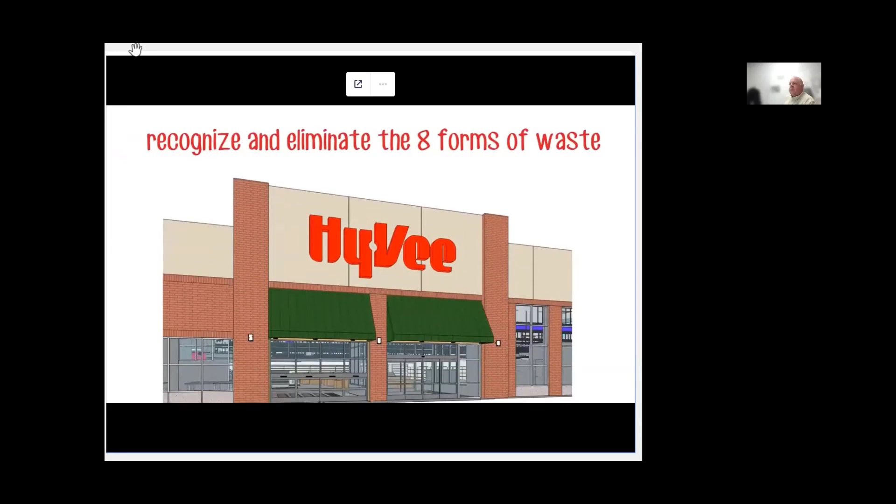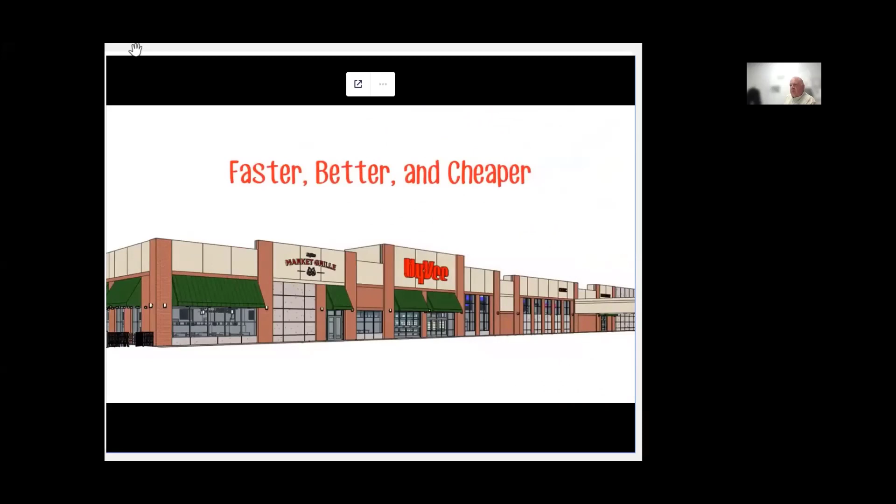Hy-Vee is a major grocery retailer currently in 8 states in the Midwest, with a mission of making lives easier, healthier, happier. Hy-Vee Construction and A+ Communication are formed to provide a higher degree of service. Hy-Vee Construction believes in the hedgehog concept, as introduced in the book Good to Great. Our passion is to take care of the customers. We strive to become the best in the world at retail construction through the use of lean practices. We are training to recognize and eliminate the 8 forms of waste. Years ago, Ron Pearson, the president and CEO of Hy-Vee at the time, challenged Hy-Vee to build stores faster, better, and cheaper than the competition. It is a common assumption that you can have 2 of these at the expense of the other. At Hy-Vee Construction, we feel that with our tools to eliminate waste, we can achieve all 3. Our economic denominator is cost savings. We attack cost from design to opening and return the savings to Hy-Vee shoppers. Hy-Vee Construction works outside the boundaries of traditional construction practices by involving the workers in planning, gaining their trust, and learning from real-time performance data. Workflow reliability is key, and Hy-Vee Construction has the tools to eliminate waste and maximize value for our customers. Hy-Vee Construction's relentless pursuit of becoming faster, better, and cheaper allows us to work as one with Hy-Vee with the mission of making lives easier, healthier, happier.

So I thought that was a good intro to why Hy-Vee Construction has started lean, been doing lean, continuing to learn lean practices, and trying to improve at all levels.

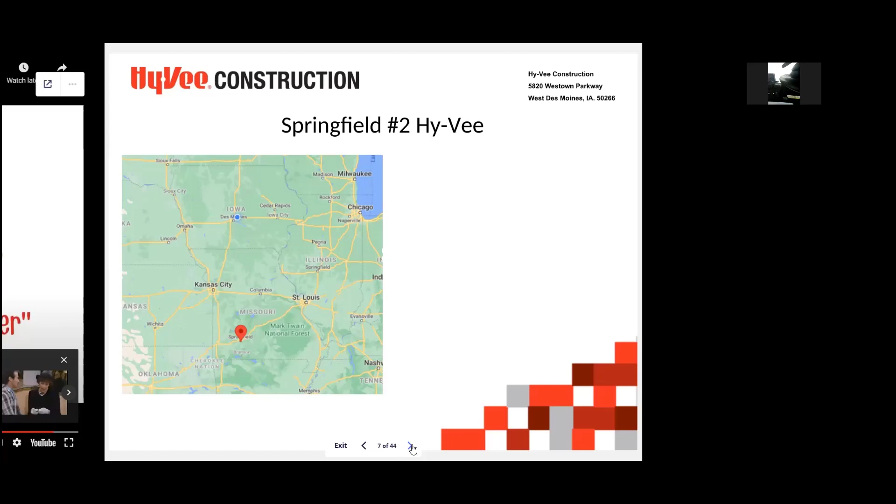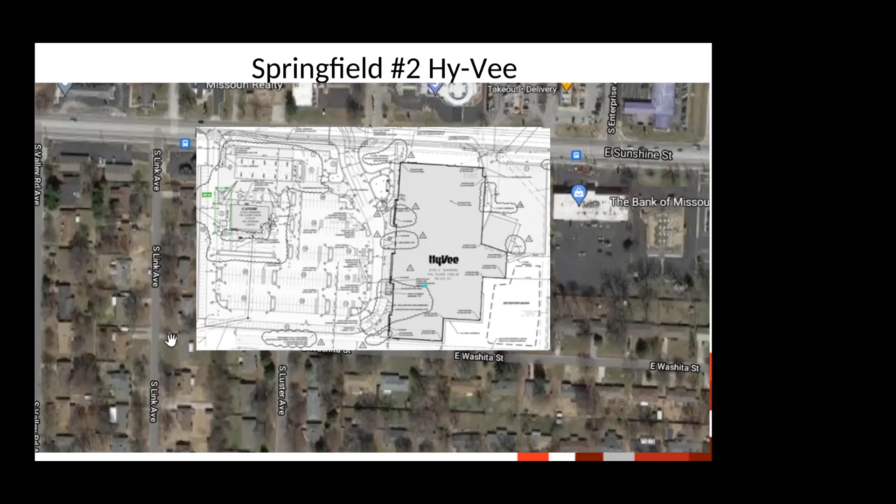The project is in Springfield, Missouri, which is in southern Missouri. It's titled Springfield No. 2 because it's the second store that will be in Springfield. The project started on a 10.5-acre site in the center of town, right on a major highway through town, surrounded by residential. As you can imagine, with an established residential neighborhood, if you come in and take down trees, whether they're really nice trees or scrub trees, that's been one of our first opportunities that we incurred when we took down all of the trees to start building the project. On that 10.5-acre site, we're going to put a 95,000 square foot store and a 5,000 square foot gas station, which we're calling Fast and Fresh at the time. So you can see that's a lot to cram into a small site that's surrounded by residential neighborhoods.

Springfield 2 is the third of the first 3 flagships of this style. This is a picture of the Grimes store. The Grimes store opens today, and I encourage all of you to go out and see it and spend some money.

It is definitely something that will open your eyes and take your breath away, and is different than any other grocery store in the Midwest, and frankly different than anything I've ever seen before. The Springfield one is going to be similar to it, but it came after this one and another one in Eau Claire, Wisconsin.

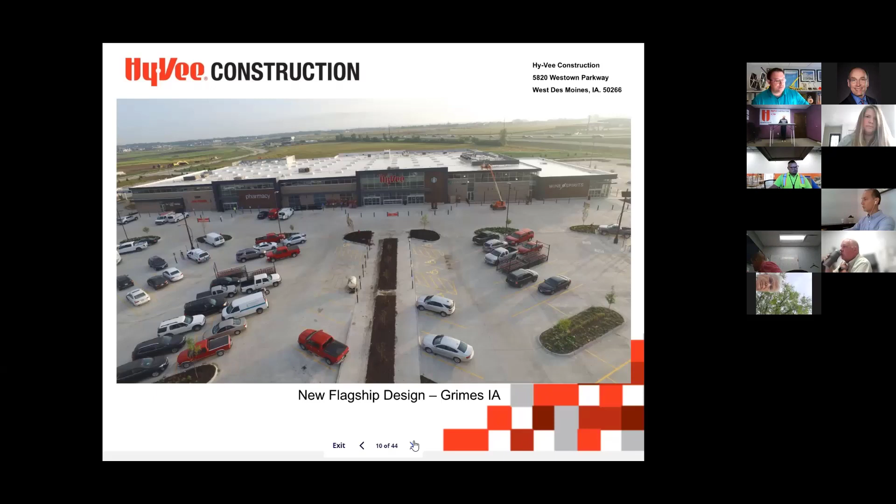We were able to learn from some of the things that they did, because this was, like I said, the very brand new design that we'd never done before.

As lean practitioners, we all know about plan, do, check, act - we're calling it the plan-do-check-adjust cycle of continuous improvement, where you set a standard, plan, work, do it, check it, then make adjustments based on what you've learned. So the title of this presentation is Planning, Doing, Checking, and Adjusting on the project. I hope by the end you'll see how we used each of these tools to continually get better, not just on this project, but on other projects in the future.

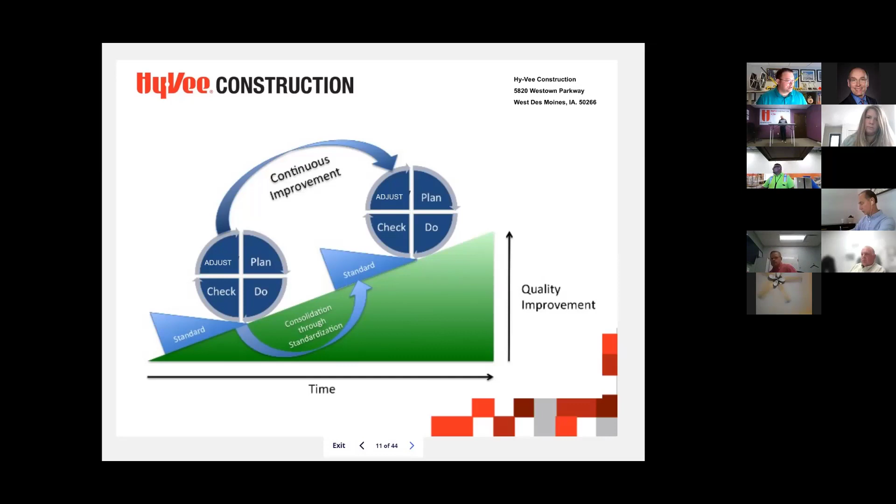Every single one of us has gone through the pandemic in some fashion. This project, having started at the beginning of this year, was kind of - COVID was still pretty prevalent. Starting a project without having the daily planning boards and weekly planning boards gave us an opportunity to think differently. As a company, it was affecting all of our jobs, so we said, what are we going to do? What program can help us out? Because you can't have people all crammed into a tight space.

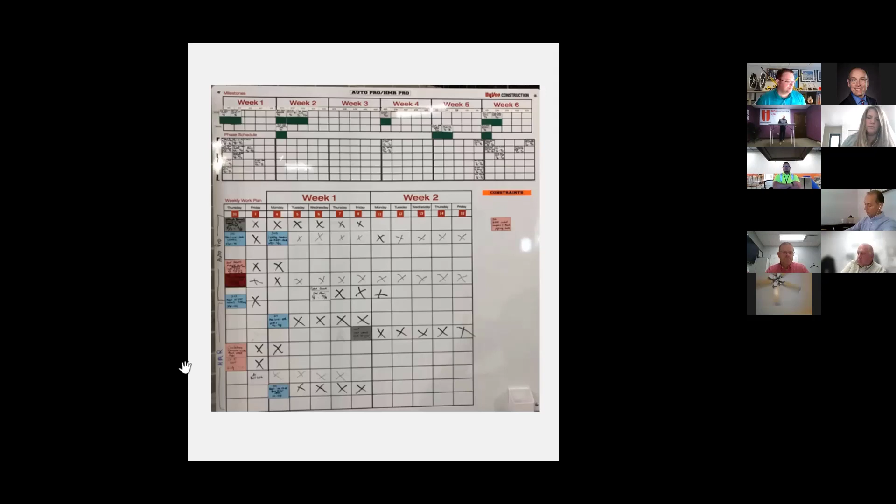Using a board like this, where you use markers and sticky notes that are being filled out, may not be a thing anymore - we don't know. It led us as a company to a program called MIRO, which is a computer program that works like a whiteboard database that anybody from anywhere can get into, and you can really collaborate in real time. It allowed us to reproduce our boards digitally with each of the different sections, and have sticky notes that people could fill out, offering us an opportunity to do our weekly work plans virtually.

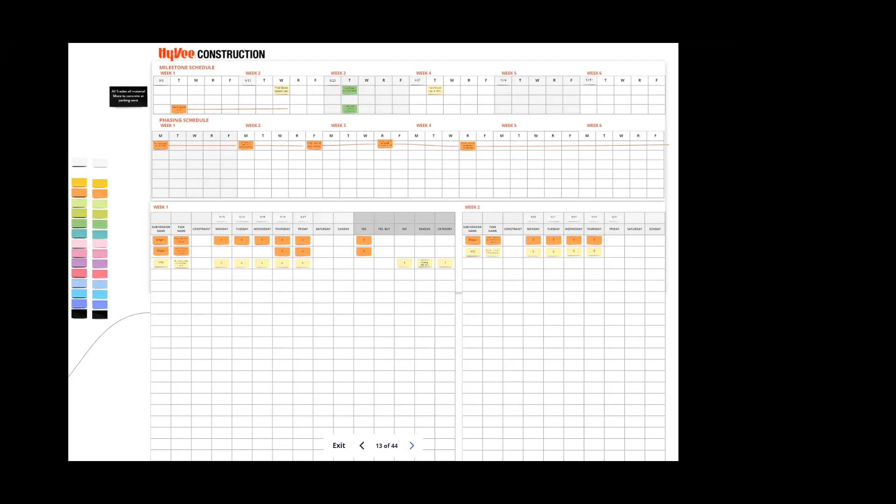But additionally, how are you going to have a pull plan and that kind of discussion? So with that, we proceeded to try our very first pull plan virtually in MIRO, and I'll let Pat talk about how that experience went.

Some of the processes we used to do were first gathering in a room, going around and taking attendance, and just kind of mingling and getting to know people before the pull plan started. We understood that we were not going to be able to do this, so in MIRO we created an introduction board with all of our trade partners, PMs, subcontractors, lead foremen, everybody in attendance. On the lower portion, we asked each individual partaking in the meeting about their likes and off-work hobbies or sports they enjoy in their free time. It was kind of an icebreaker - you got to know and understand that person, even though they were on a Zoom call far away or right next door. So this was our first pull plan.

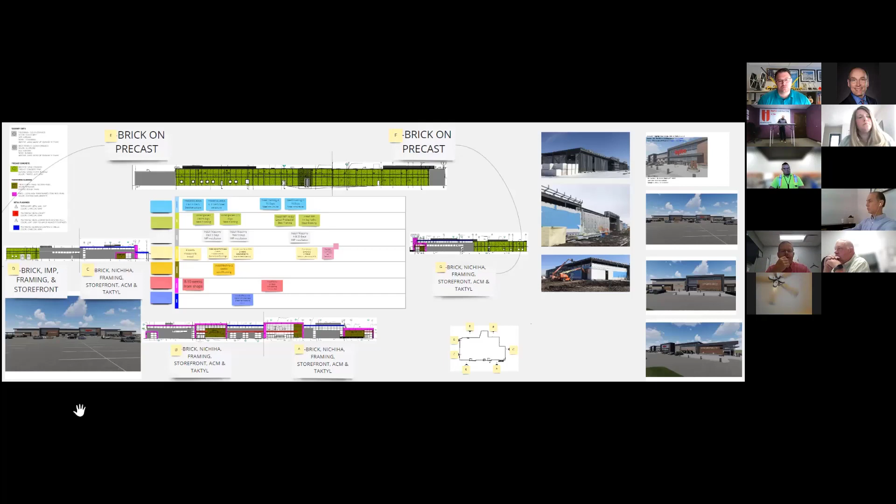Again, we used to do this in one big room with a dedicated wall, maybe a piece of paper or a whiteboard or some physical structure in front of us that we were collecting information on. So once again, we found ourselves not struggling, but understanding that the board could offer a platform to do a pull session on.

As you see here, this was our first one, and it was for our exteriors. As you can see off to the right, we used some of the conceptual photos we were privy to before construction started, and right next to that, some photos that came from Grimes. We were fortunate enough to add those photos to this board, which gave us a real understanding of some of the walls and exteriors we were going to be walking through. On the bottom and side above the other conceptual photos, you see where we had highlighted as we went around the building.

This helped us, Hy-Vee Construction, understand exactly the areas we wanted to focus on and which areas needed to go first to get the detail we were looking for. It was a very helpful tool for logging the information you see in the center - this was an interaction between Josh and I. Everybody invited to the meeting, as you've seen on the attendance, was able to see this and also participate if they had the understanding and were tech-savvy enough to fill out their Post-it notes and place them where they should - somewhat like almost exactly how we used to do on a physical wall or piece of paper.

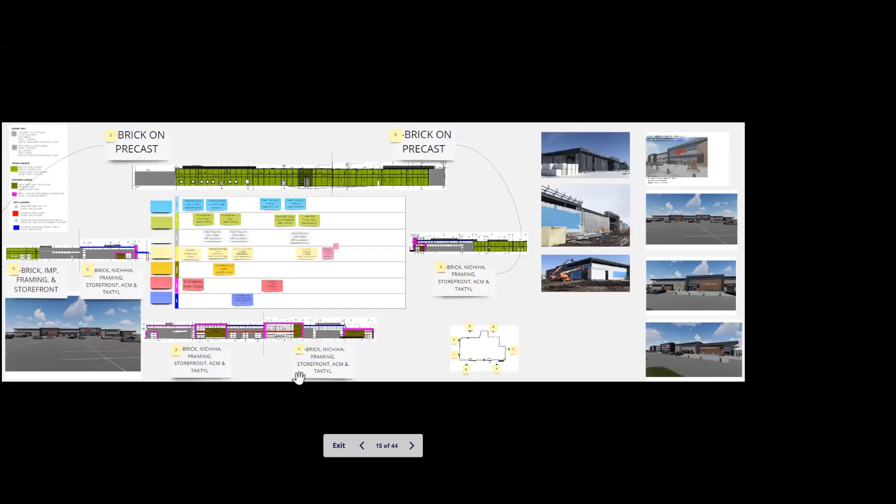The other benefit of highlighting was that it really allowed us to label out all the different layers of the building. This is a very brand new prototype for Hy-Vee, so we had the benefit of Grimes to see all the different layers of the building, but we could also highlight that and allow the different trades doing each item to focus and be participants in those conversations. As we found out in Grimes, there's a lot of detailing involved to make sure all those layers work together, and this conversation allowed us to focus on it a little better.

So this is an example of one portion of the MIRO board. These are individual boards, all labeled as a particular portion of the job: site, structural, site utilities, etc. As we get into our meetings on Wednesday, we go to each board and sub-board and collect that information, whether it be milestone phasing or week 1, week 2.

So this is zoomed into one of the boards. Like we talked about with the old board, now you can see them kind of side by side, how we have the different layers, and Pat will talk about how the different layers work and how the participation works.

Thanks, Josh. The board you see to the left, which we showed earlier, was what we all knew and used, and it was a great tool. With this board, we always encouraged group participation, to come up and move magnets or make the physical commitment at the board.

Well, like most of our lives, when COVID hit, we were stuck understanding that we really couldn't have that interaction anymore. So it was a little bit of a struggle at first. Our work kept going, and we knew we needed to gain this information and log it into a board, so we tried several different things.

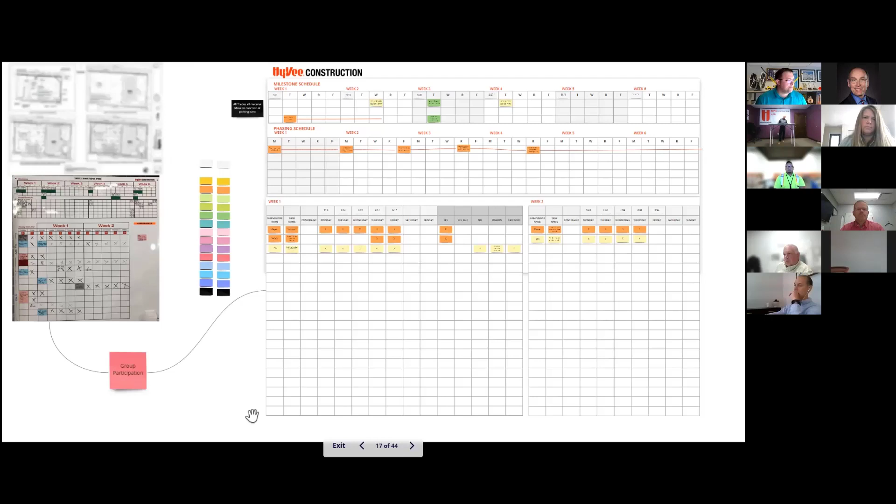The group participation we found was still there, but there's still a lot of learning curve with trying to get everybody to understand and use it remotely.

So a breakdown of these boards: this is the milestone schedule. We went through the pull session—we had already generated a generic schedule, then went through the pull sessions and updated it. A lot of the milestones we identify weekly on our 6-week schedule and master schedule are put on this portion of the board.

We also encourage each subcontractor, lead foreman, or project manager to identify some of the things they consider milestones. We have it in our head what we want to see and where we want to be at a certain date, but maybe we're overlooking something, so we offer up this information to each subcontractor foreman to provide a milestone phasing schedule.

So this is just a further breakdown of the milestone schedule—we're all familiar with this. Basically, we're taking one milestone and backing off, splitting it up into durations. Further down the chart is week 1, week 2.

So it's meeting time. My meetings are 10 o'clock on Wednesday. We are at this point kind of hybrid. Some of the guys show up that I work with day to day, and some are remote.

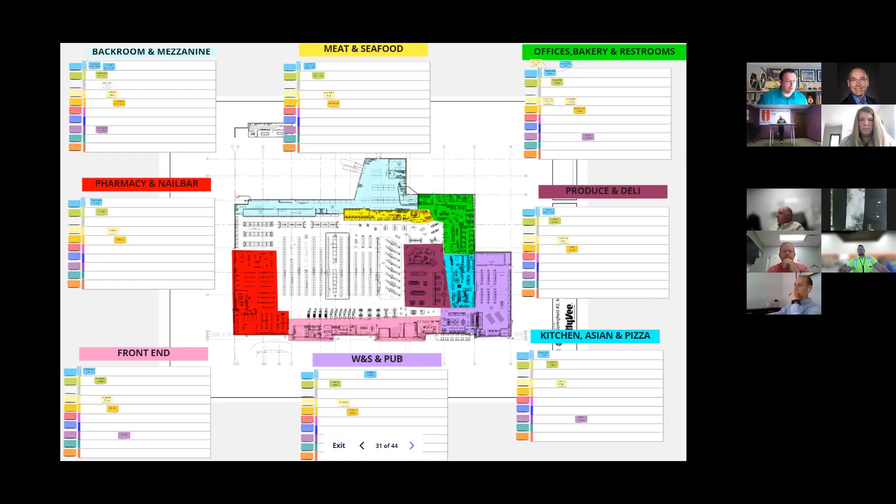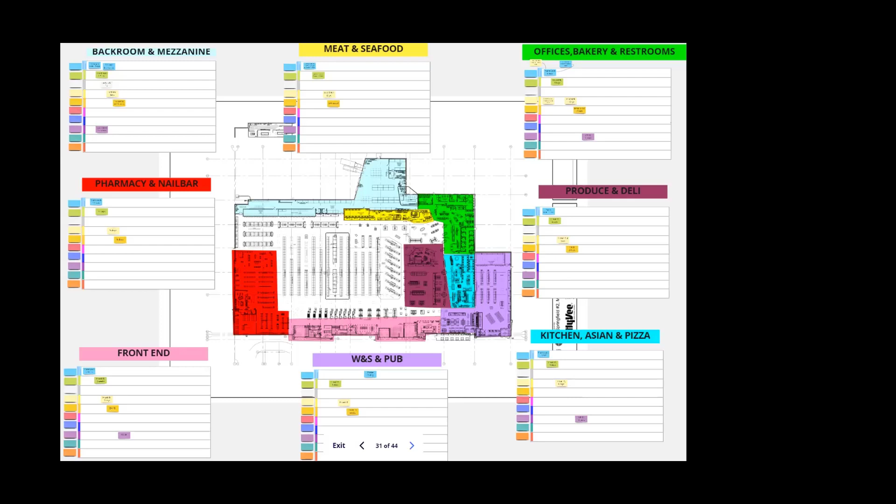To add to that, Josh, after we did this pull plan, we were told of some other delays in other areas of the building, which we'll touch on now as we go through the pictures. So one thing we knew in our head was that we could start our interior framing in departments and go as far as we can, as long as the concrete's underneath our wheels, we can keep rolling.

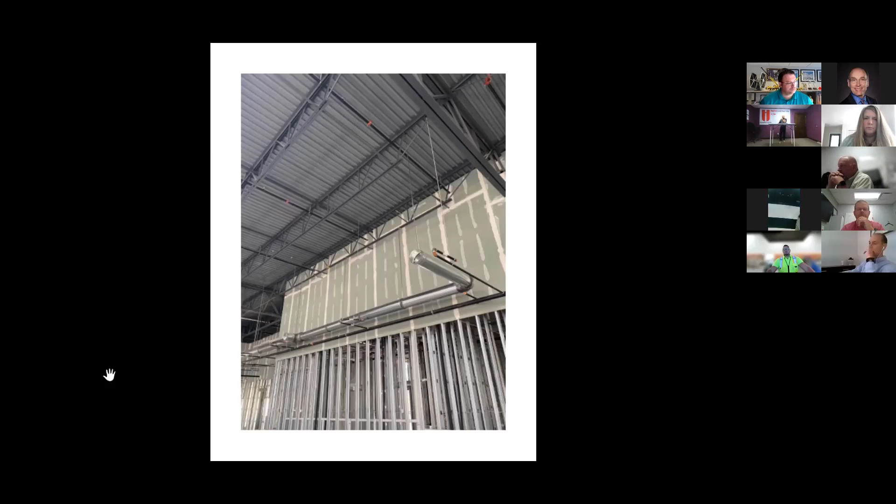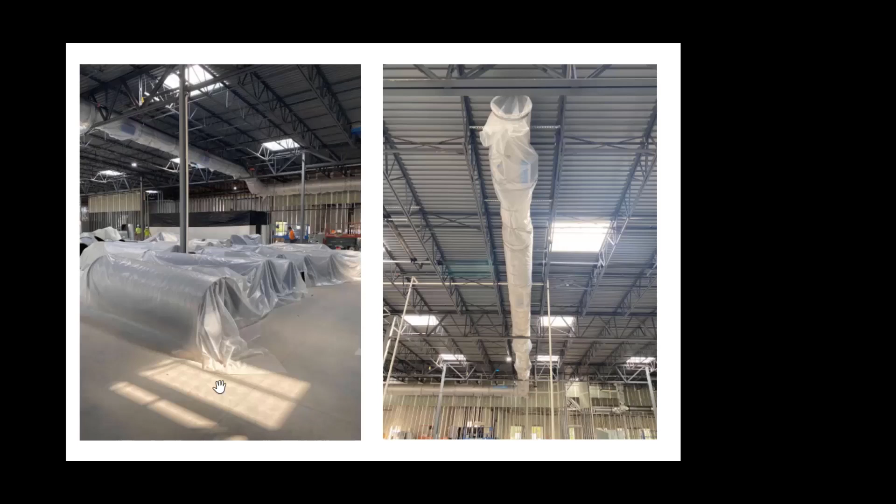So these two pictures here, the one on the left is obviously the HVAC spiral duct. We knew that we were going to be able to move forward with the spiral. One thing in our pre-construction or pre-pull plan conversations was, okay, we're not going to have any issues with the duct going up or anything like that.

But then we overlooked the insulated interior part of the duct and closing it off for any dust and dirt. We were not only going to take all of our duct and stage it on the floor, which was going to have to be covered as you see in the picture, but once it got installed overhead, we were going to have to cover it one more time to make sure that moisture did not get in.

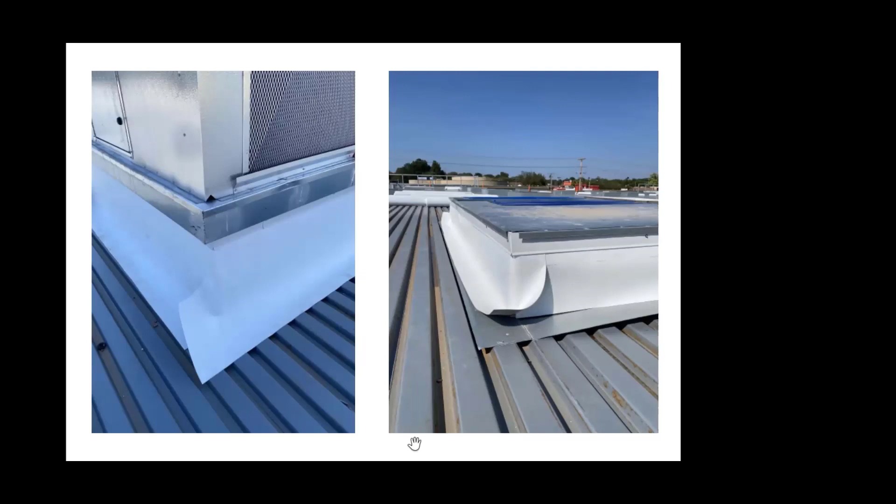We were notified that we were not going to get a roof anytime soon. Several things came up, but one of them was that we were not entertaining stopping any of the deliveries. The first one we were faced with was some of the big rooftop units, the refrigeration units, big Seasons 4 units, and all the department RTUs that were scheduled to deliver. We were not okay with setting them on the ground, and we were not okay with pushing the deliveries out.

So we got with our roofer and were able to put enough material together, flashing, and get the curbs ready for the units to set, as you see here.

The picture on the left is our Seasons 4, and the other one is a curb waiting for a unit to be set. I don't know how many of you have ever installed rooftop equipment without a roof, but it was definitely a first for me.

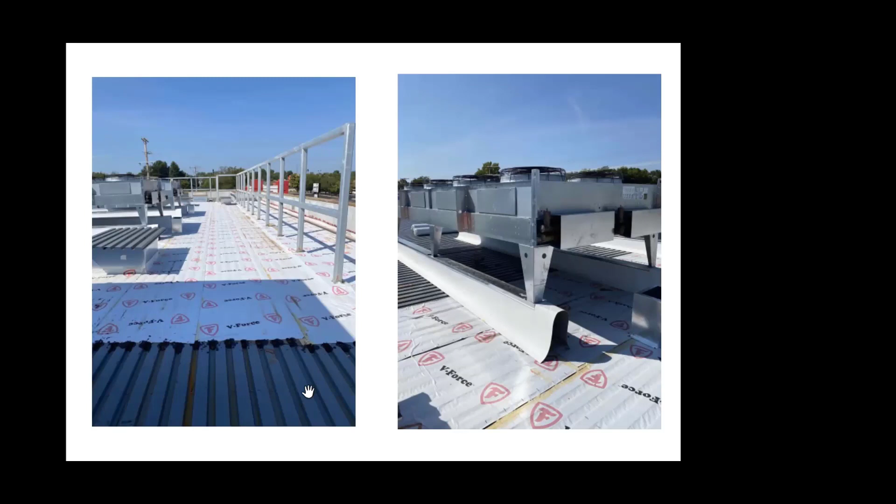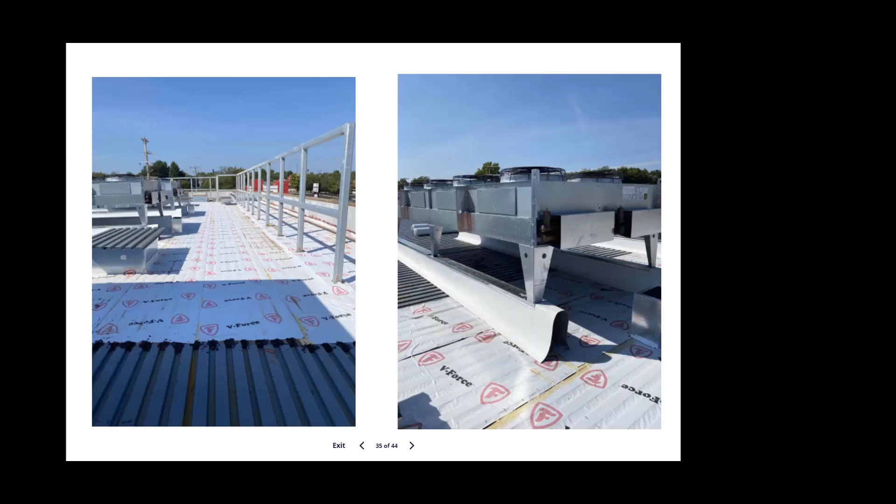These two pictures are two other opportunities that we knew needed further conversation. What you're seeing is a temp roof installation, ice and water material in just one area of the building. Below this is our mechanical mezzanine, where we have our switch gear with main distribution and several sub panels, the backup generator in the same area, and two refrigeration racks. All these are obviously moisture sensitive pieces of equipment. We opted to do a temp roof in this area and dry it in, due to the fact that this equipment has to be loaded in prior to some of the walls being built.

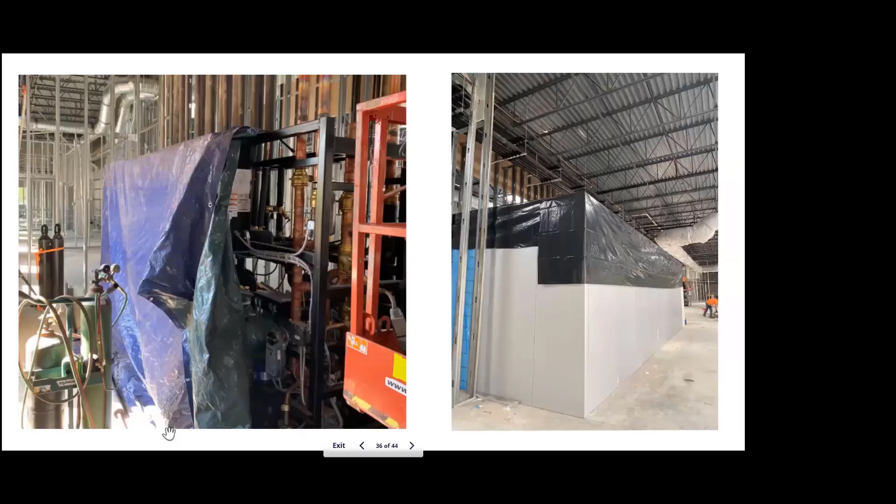Some of you might ask, if this temp roof was an option, why didn't you just temp the entire thing and proceed with drywall and finishes? First, we'd never used the product before and were a little leery. Second, it was pretty cost prohibitive to do over the entire building square footage. It did allow us to make a strategic move to cover an area we couldn't move forward on without additional protection. These two photos demonstrate some of the precautionary coverings we put in place.

The left one is a refrigeration rack, particularly on the sales floor, and every morning and every night the refrigeration guy covers and uncovers it so he can make his connections out the top. Some of the electronics, as you can see, are covered up right there.

Some of the other challenges we were faced with was cooler delivery. This was after our pull plan for the roof. We were notified our coolers were also going to be delayed for some of the same reasons the roofing materials were delayed. As of today, these two areas identify, as you can see by the lines in the floors and the frost breaks, where two cooler freezer combos are to be placed and are currently missing.

The picture on the left is our kitchen. You see the walls off to the left and back right that back up to the freezer cooler combo. We had to really get into the details and make sure we're operating and laying out off the correct shop drawings to place these walls.

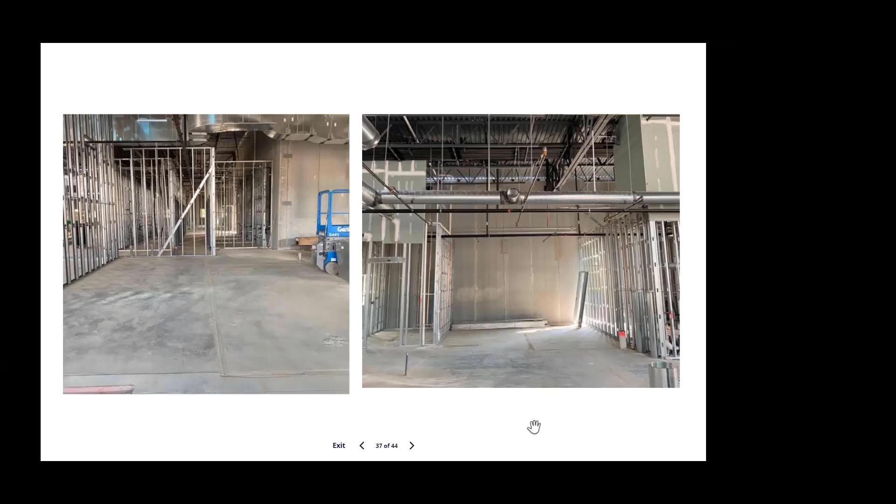The one on the right here is the bakery freezer combo. Once again, we built up to it on both sides and are waiting - we were supposed to get the delivery today, and it's also been pushed back another week.

Without receiving our cooler boxes, and with the continual emails we get about them being pushed back, one thing it has caused is a bottleneck of materials and equipment arriving on site. Like I mentioned earlier, what we didn't want to do was push back any of our deliveries for fear of something getting lost in the shuffle, storage, and so on.

So we've been taking the deliveries, and these two photos are the components for the coolers. The picture on the left shows the hanging coils that go within the coolers, which we've had to catalog, store, protect, and move several times so we can continue with work around them. The picture on the right shows the doors, not able to be installed, along with the glass next to it and some of the shelving - just photos of material we've had to store on site, causing a bit of a logistics constraint.

Along with some of the containers you see in the picture on the right, that we provided and keep adding - for instance, one of them contains all of our drywall because we heard there was going to be a shortage, so we bought it up and stored it away for when we need it.

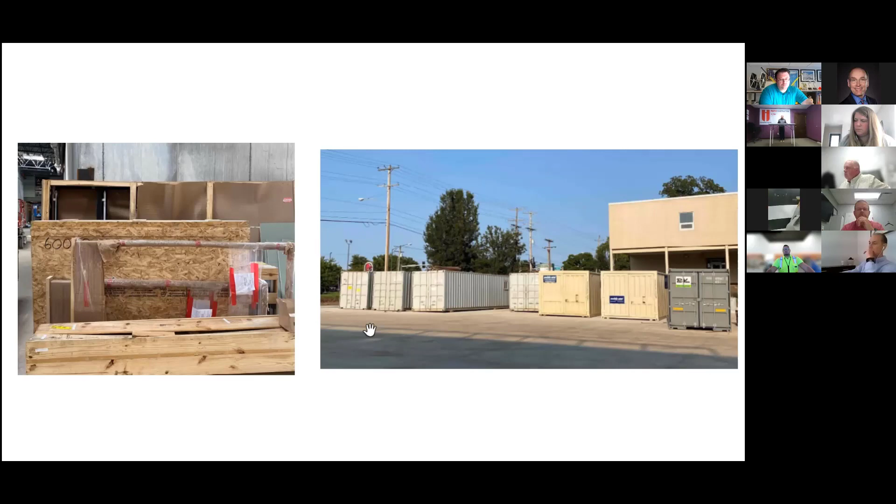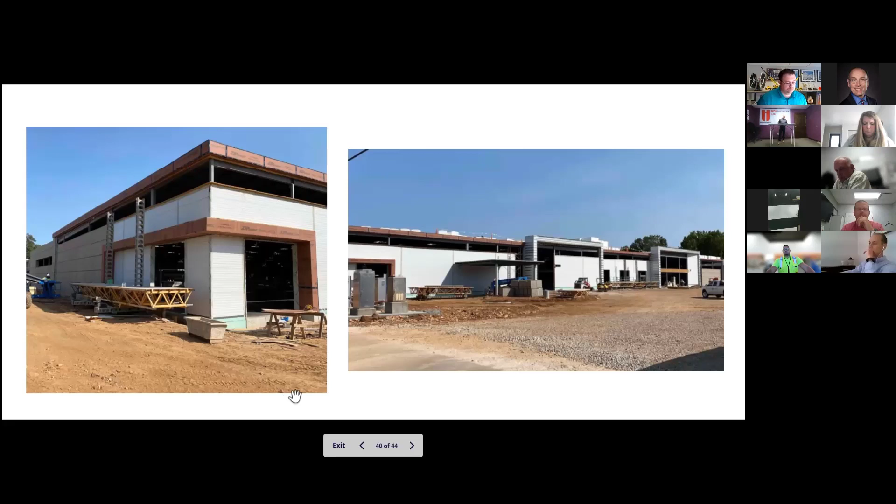We are starting the curtain wall installation today. We're moving around the building with brick and doing our final measurements for ACM, tactile, and our order for Nichiha. On the right is just a front elevation. These were both taken this week.

As you can see, we're still in the dirt, pushing to get enclosed before winter. So the C-Store, as Josh said earlier and showed the layout, this is a 10.5 acre site, and on this site is also a C-Store, branded Fast and Fresh. Some of these constraints and opportunities we ran into also with the Fast and Fresh, one being the roofing, also the cooler. With the roofing, we were able to put enough material together to do this smaller formatted roof to get in the dry and move forward, keeping our opening date on schedule.

So to add to that, Pat talks about putting it together. Literally, this was put together from multiple pieces and parts. At the time we were putting together this 5,000 square foot building worth of roofing, we found out that our main roof, we had the material coming, but they couldn't find any screws or plates for attaching the roof. The dates we were being given were January. At that time, we reached out to many of our partners throughout all the different states we're operating in.

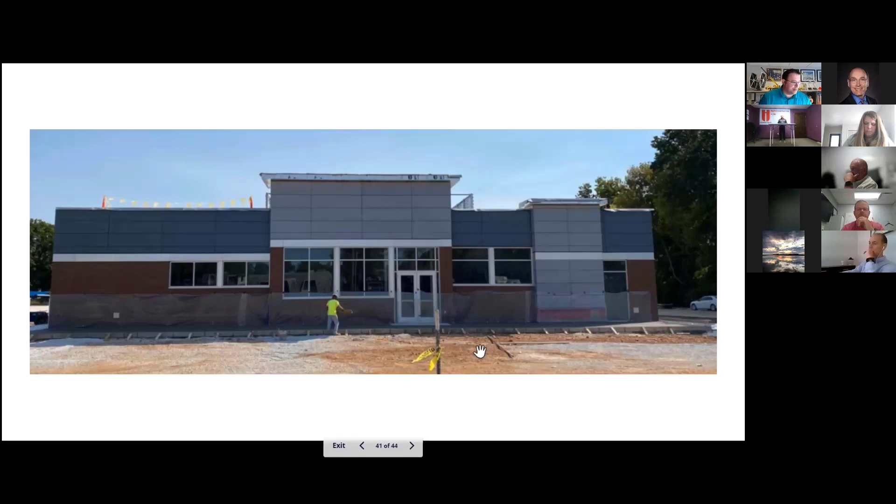But there was about a month period of time where we were going to get a roof and all the insulation, but weren't going to be able to install it, which, yes, it causes frustration, but it offers opportunities to think differently about how you put things together.

And in that, cooler manufacturing has lots of opportunities. This one's actually going to be built from pieces and parts from multiple coolers that we could find, kind of custom built just to facilitate the opening date, which is three months ahead of the store.

One thing we didn't really talk about on the site, anybody doing gas tanks or large fiberglass tanks for any sort of building was also in the delay. We actually gave up our tanks for another project that opened prior to us that wasn't going to get tanks until November. We just got our tanks last month, but on a gas station that's a significant portion of the underground work. In Missouri, there's rock, so making sure you have enough room for excavating and getting that in without impacting the C-store build itself was an opportunity we've worked through, but it has all arrived.

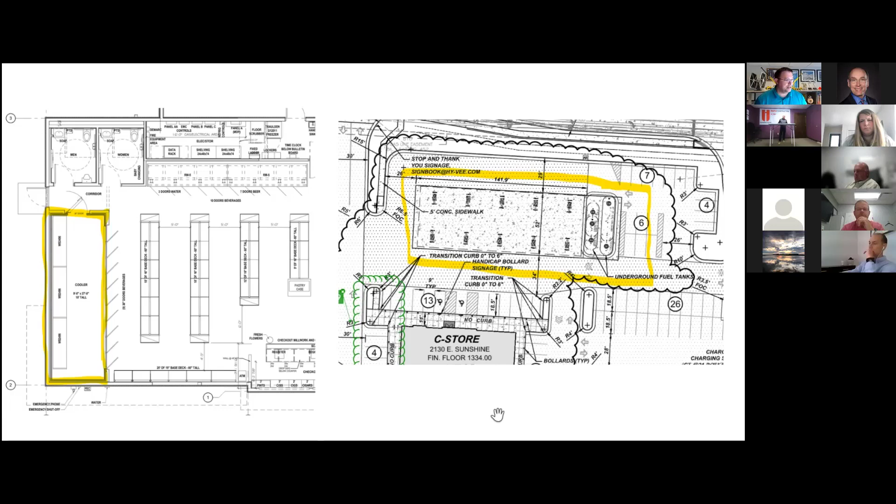We have other locations where the tanks are months away. As we've talked about the planning of the work with the weekly work plans and the pull plans, actually doing the work with pictures of progress, checking the work with our charts showing where the constraints are and what opportunities there are with the different categories we're tracking, gives us opportunities to go to subcontractors and adjust. Maybe it's communication, maybe it's a definition of the work area, maybe it's not an understanding of other things, but it allows us to continually improve and adjust.

We've talked a lot about the roof. Our roof actually did just arrive, and we're getting started with it, which is a huge relief in many ways. That allowed us to say, now that we have the roof in our hands as it's getting installed, we can have another pull plan to talk about the finishes, because we've never been at a place where we have all the walls framed ready for drywall to be able to drywall a whole building at one time. We're very used to: got it framed, did some roughing, now we start drywall, kind of doing that pace or takt time with every single department.

Again, we have the opportunity to think a little bit differently about how we build a building, how we put it together. That pull plan is scheduled for next Tuesday to have the discussion with the subcontractors and say, here's our opportunity, here's where we're at.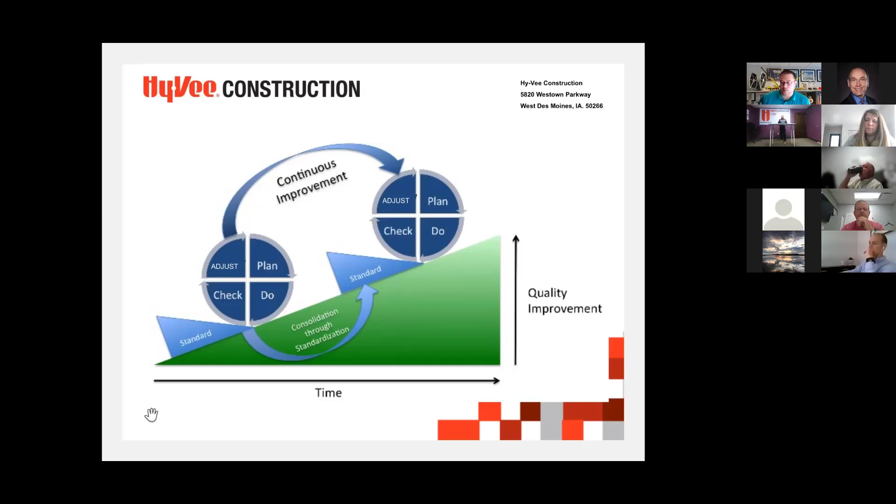How do we build it the most efficiently and work together? Pat had an instance with our roofing where they were able to coordinate the drywall to start delivering as soon as the roofing was done and enough in an area to get started on the offices. So it's continuous communication with all the trades, everyone involved, truly being a partner together.